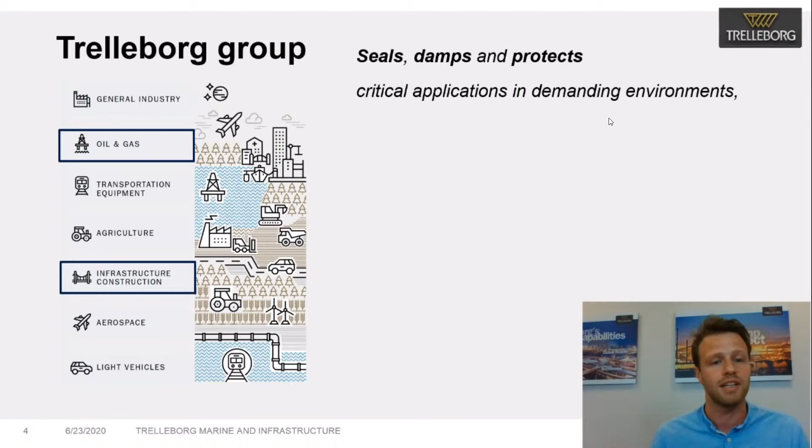I'm not sure what your geographical knowledge about the Netherlands is. That's why I showed a big map of the country we're living in. And the company of Trelleborg Ridderkerk is located where the big red arrow points at. It's basically located at the perimeter of Rotterdam. And the business it entails has to do with immersed tunnels, underground construction, energy, dredging, water management, and noise and vibration. So we are here already for more than 140 years, so we have quite a lot of experience.

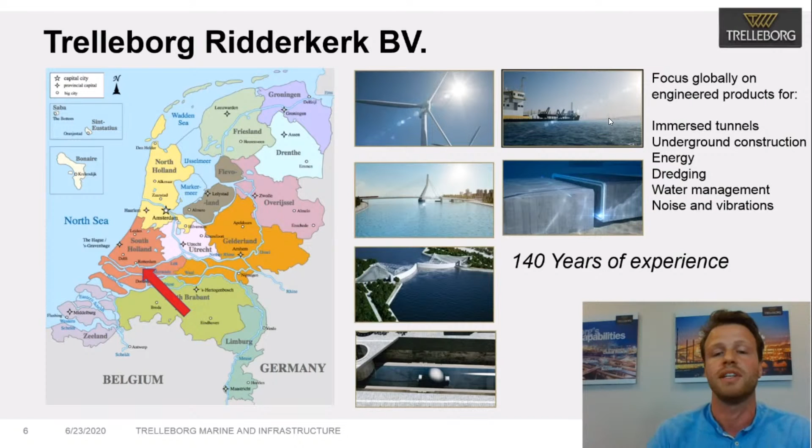And on these pictures you can see some key projects we've been involved in. So that is, for example, immersed tunnels on the right side, the storm surge barrier, and you can see the Erasmus bridge where we created the bearings for.

As I mentioned, I'm design engineer, and these 4 products are some key projects I've been involved in. 2 of them are very big Chinese projects, which is the Dalian Bay link on the upper right picture. Underneath, you can see the Shenzhong link, and both of those tunnels are still being constructed as we speak. A bit older tunnel is the Guldborgsund tunnel in Denmark. That one was mainly a renovation project. And the one below is the MOSE flood protection project in Venice, which is designed to keep the water out of the city.

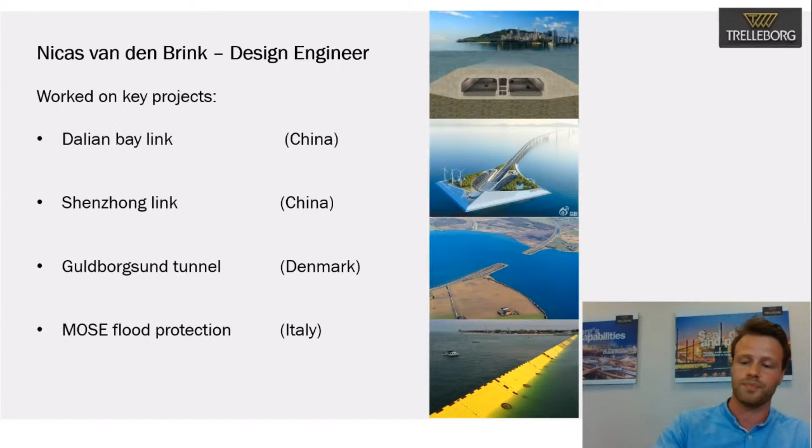So let's dive a bit into history. It all started out with the Thames Tunnel. So I think a lot of people already know about this tunnel, which is quite a famous one. It was the first time that there was a need to build a tunnel under a waterway, which was the Thames. So back in the day, London was a big metropolis.

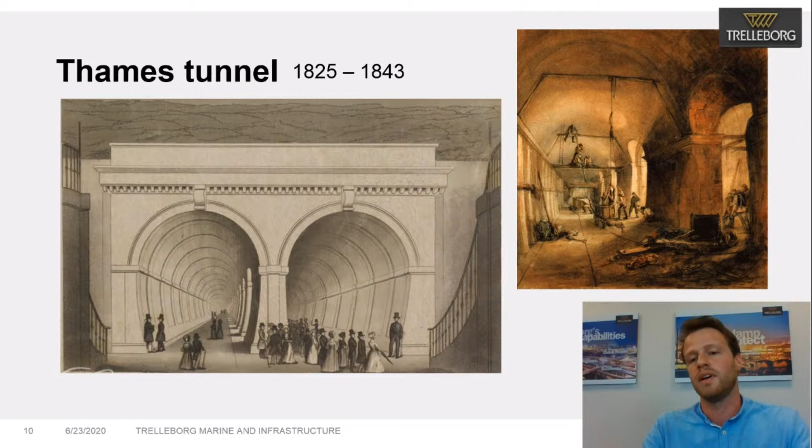There was a lot of business going on, and there was a need to cross the waterway in order to arrive at the docks. However, a bridge was not suitable for that application, as it would stop the sailing boats from entering the city. So they needed something else, and that's why Marc Brunel first made a tunnel under the Thames, under a navigable waterway. However, this was still a bored tunnel, so it was still not the beginning of immersed tunnel construction.

And the first physical proof that the concept really worked was in 1893 with the Boston US sewer tunnel. However, it was still not a tunnel that could be used for human transportation. That happened actually later, about 20 years later, in Detroit in 1910. So this picture shows what that tunnel looked like. It was a steel tube tunnel, a double one, and you can still see it today as it is still in use between Windsor and the city of Detroit.

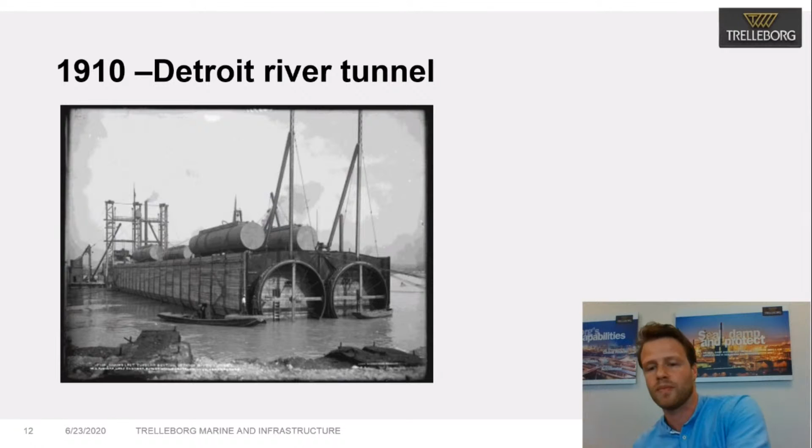So this project is a bit closer to home, in my hometown of Rotterdam. Here you can see the creation of the metro tunnel. It's being constructed using cut and cover construction, so it was not lowered down, but it was actually made on site. And on the right side, you can see the first GINA rubber product that we created in Ridderkerk that was actually applied within this construction.

The nice thing about the story is that during renovation work, we received some samples of the GINA seal gasket and other rubber products back from the tunnel owner, which provides us very valuable information about the lifetime and the rubber qualities over time when you place it into a situation like this for more than 60 years. So I will come back to this GINA profile and the properties of the rubber material that it has after a certain amount of time.

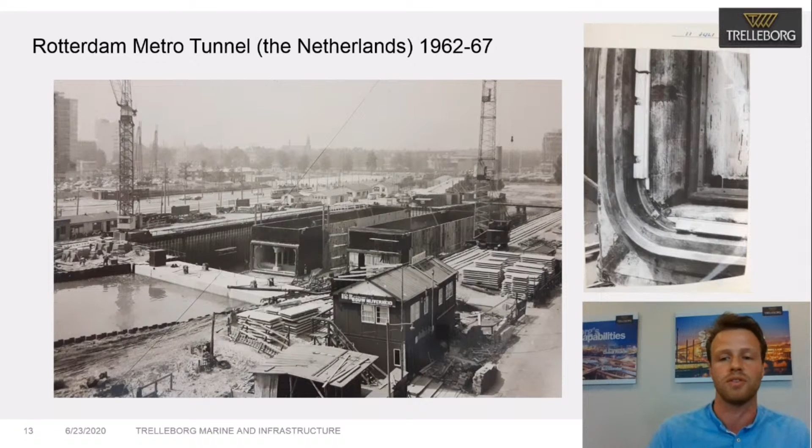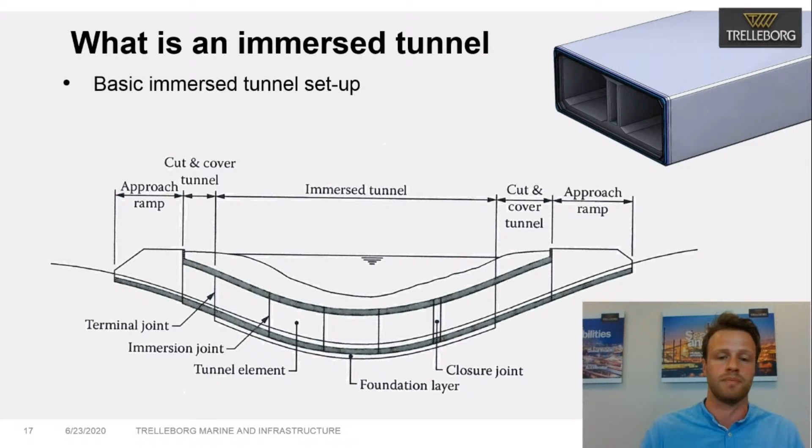So now the question arises, why actually build an immersed tunnel? Because there are so many other options to cross from point A to point B, obviously. Well, it depends on what your situation is. But there are a lot of advantages for immersed tunnels that speak for this technique. At first, it's very suitable for short, shallow crossings in soft soil.

Also, the shapes are very flexible in dimensions, because you can just lower different types of cross sections. And if you want to provide a tunnel that has different lanes, you can do that. You can just construct a 6-lane cross section and lower that into the trench. And you can also change those 6 lanes to an 8-lane or less, obviously. That's something that cannot be done so easily with a bored tunnel construction.

Another advantage is the land reclamation opportunities it provides, because you have to suck out land in order to make the trench in which you place your immersed tunnels. This land can be used simultaneously to create artificial ground or artificial islands in the surrounding area.

And last but not least, it can be economically very feasible to use this kind of technique too. So mostly these types of techniques are used in areas where there's a lot of water, a lot of urbanization going on, and the soil is a bit softer than usual. So keep this technique in mind when you are designing for these kinds of circumstances.

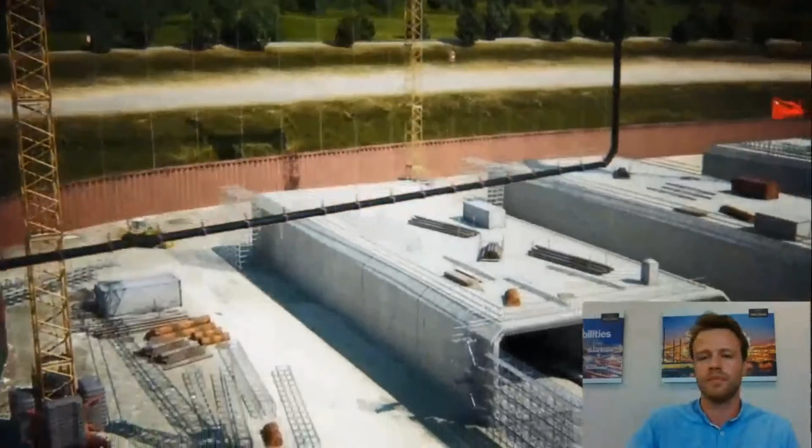Now I will show you a short movie introduction of the immersed tunnel technique that will hopefully clarify everything I just said. So here you can see the building.

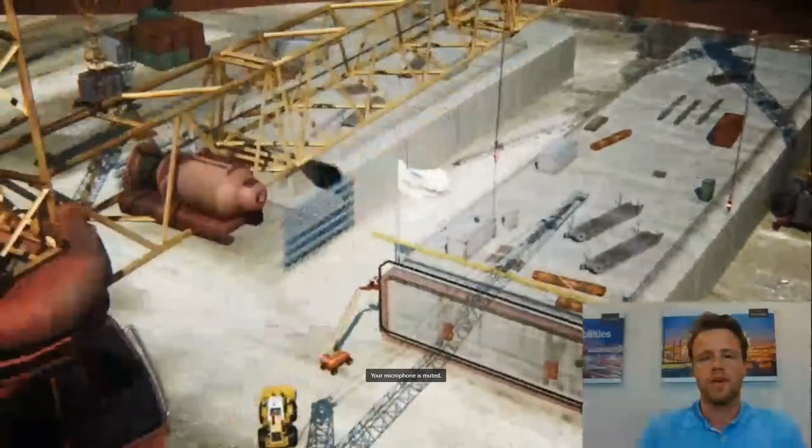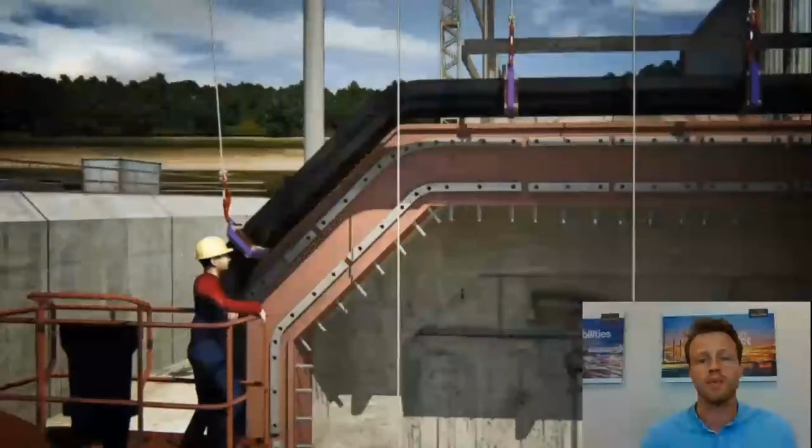So the big GINA seal will be installed on the dry dock by clamping it into place. So you will use steel end frames, steel clamping systems to make sure the GINA seal will stay in place. You bolt it down together, provide enough clamping force in order to make sure it stays in place.

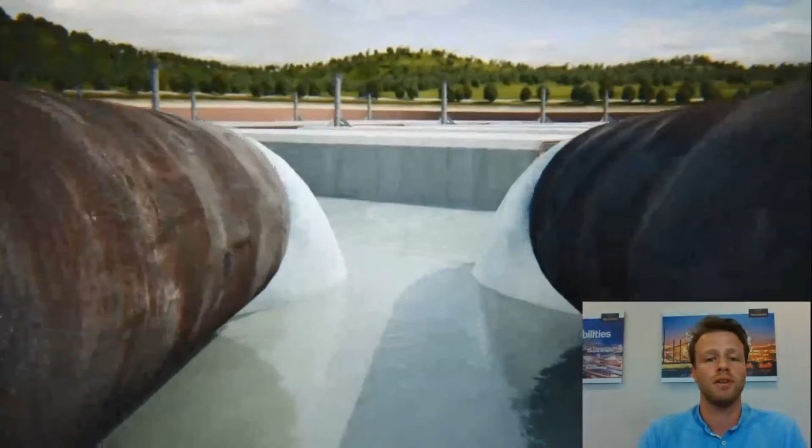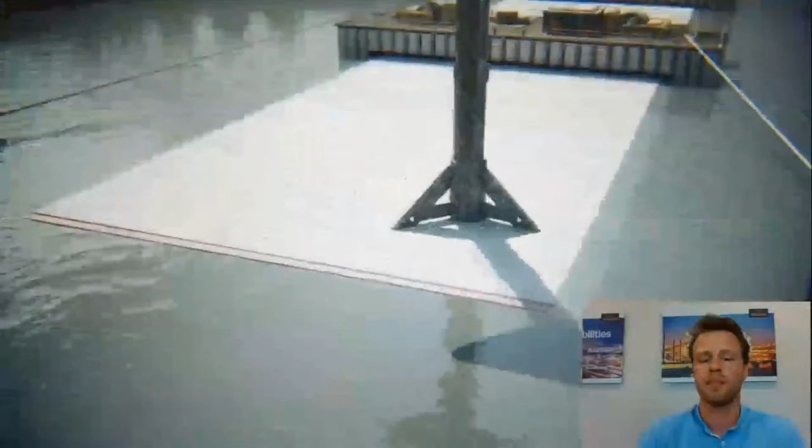So here you can see that, obviously. There is more compression. Now we can see the omega seal being clamped into place, which is basically the secondary sealing solution. And many more are to follow. And when everything is done, you will see that an infrastructure is being created.

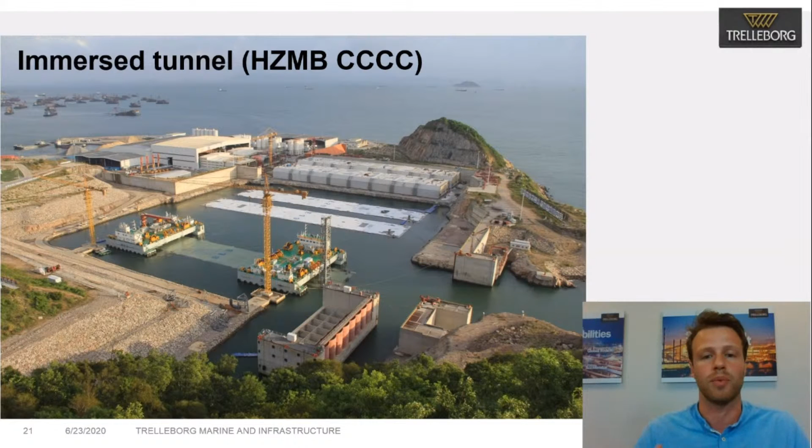Here you can see those tunnel elements are being floated after the dry docks are filled up with water, and then those elements are moved to the right location.

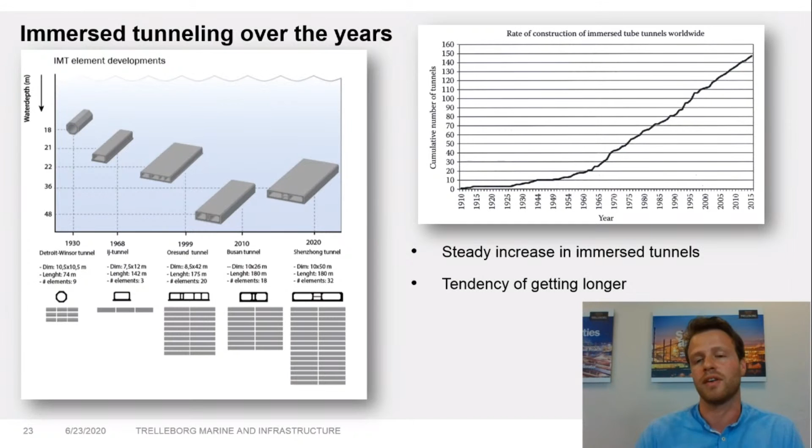At the same time, we see a steady increase in immersed tunnels. On the right graph, you can see that there is a very linear progression in terms of new immersed tunnels.

So there are different types of immersed tunnels, because at the Detroit-Windsor tunnel we saw that the first immersed tunnel was a steel tube type of immersed tunnel. But in total, you can say that the concrete monolithic type of immersed tunnel is way more popular. It entails more than 50% of the total amount of immersed tunnels.

And yeah, this technique is mostly used in Europe and in certain parts of Asia as well. It kind of depends on what the requirements are. Sometimes political pressure is also of huge influence in the decision making for these types of different structures.

You can imagine if you're living in a country or a place where the shipyard industry is very big, that there is a big lobby to make these types of immersed tunnels with steel shells. But when the experience lies more in the field of concrete pouring, you can imagine that people want to go with this type of tunnel. Another big advantage with concrete monolithic structures is that this technique is way cheaper to perform than steel types of tunnels. And the single steel shell, for example, is something you don't see that much anymore these days.

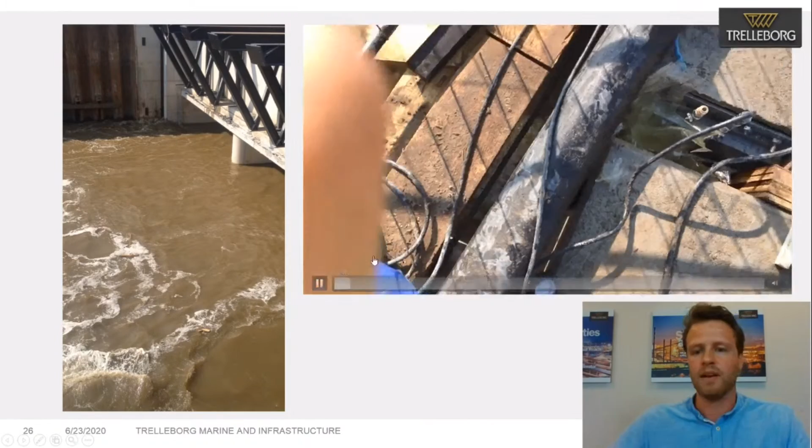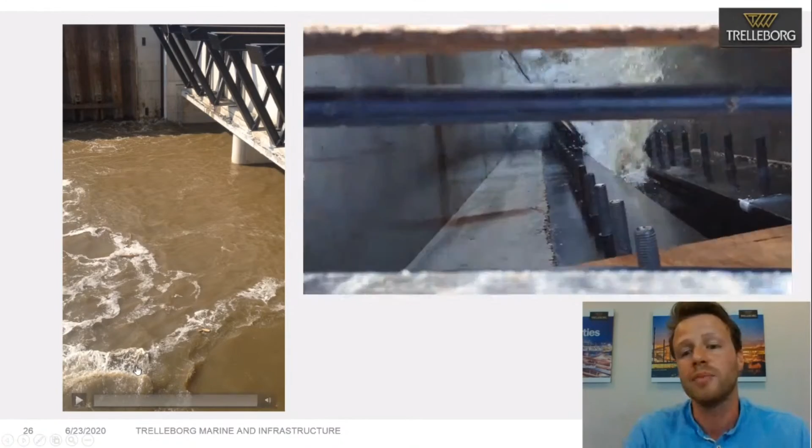Sometimes things go wrong when you construct immersed tunnels. That's obviously not something you want to happen, but calamity is not a stranger to us. We have experienced different types of calamity in the past, and we do not run away from it, but we like to learn from those mistakes. So here you can see my colleague, who is in a building construction, and an inflatable type of seal was not performing anymore. So the whole construction site started flooding with water. There was just a combination of different things going on at the same time. Fortunately, nobody got injured that day.

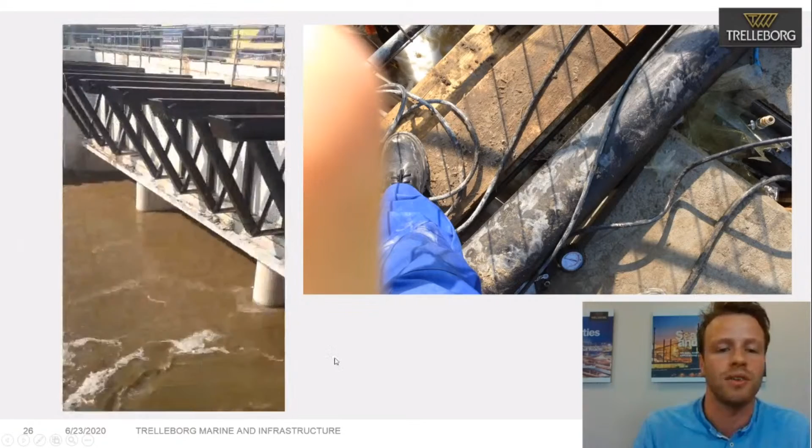However, this obviously has a lot of financial consequences when something like this happens. Eventually, everything worked out fine. We worked together with the contractor and the other parties involved and found the best solution for this small disaster, you could say.

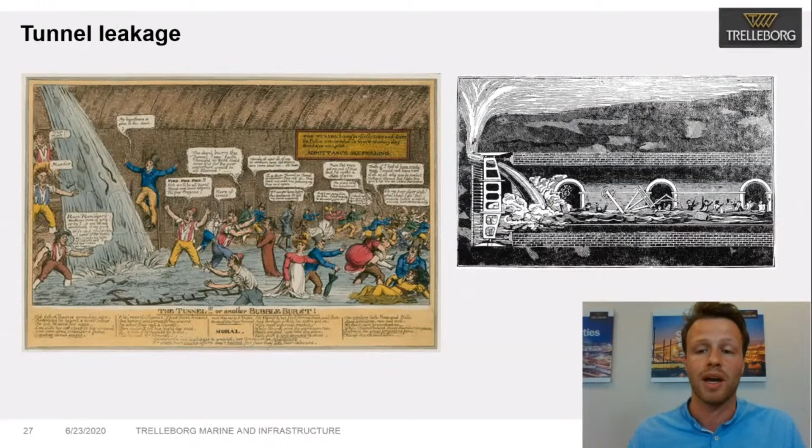Calamity was also not a stranger back in the day. During the construction of the Thames tunnel, there were 6 different floods. During the second flood, there were even 6 deaths reported. And there was a lot of skepticism back in the day, whether it was even possible to cross such a navigable waterway. Fortunately, people just continued pursuing this type of technique. So that's the reason we are here today with the tunnels we have these days. So we should be grateful for that.

So we talked a lot about steel and concrete. Now let's see how rubber fits in this whole story. When you design for immersed tunnel projects, there are a lot of different environmental impacts that can have an influence on your joint design. For example, when you start building an immersed tunnel in a high seismic area, for example in Istanbul, you have to take into account that there can be a lot of dynamic activities influencing your seal. So you have to make sure those tolerances are lined up with your design. Also, when designing with concrete, those elements tend to expand and retract over their lifetime, which are also tolerances you have to accommodate into your design.

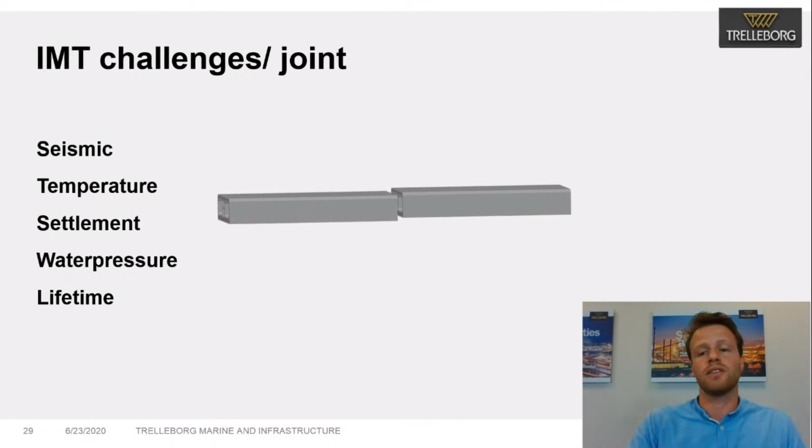Ground consolidation over the years has a huge impact on your joint design too, and at the same time you will have water pressure that ranges from high tidal pressure to low tidal pressure, and it can affect it during its lifetime. When you design a tunnel for 120 years, you can imagine there's a huge range in water that it has to accommodate. As I mentioned, a general lifetime lies between 100 and 120 years for these kinds of tunnels. It depends who the tunnel owner is.

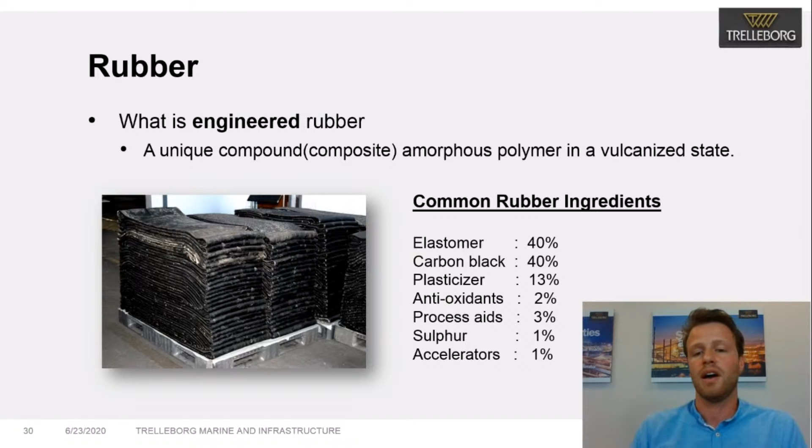So if we look at rubber as a building material, in the lower left corner you can see how the rubber generally arrives at our factory in Ridderkerk, like big sheets of plastic layers, rubber layers. Rubber is a unique compound. It's an amorphous polymer in a vulcanized state. And the general ingredients that it contains are listed on the right side. So it has a lot of elastomers, obviously, carbon blacks, hence the black color. Sulfur is needed to make sure everything can be vulcanized.

It basically functions as an accelerator, but you can combine it. It's basically a recipe for the things you want to build. If you want to build a rubber that's resistant against ozone, you probably need different ingredients. If you want something that is resistant against oil or gas or something else, you will need a different type of recipe to come to the right compounding.

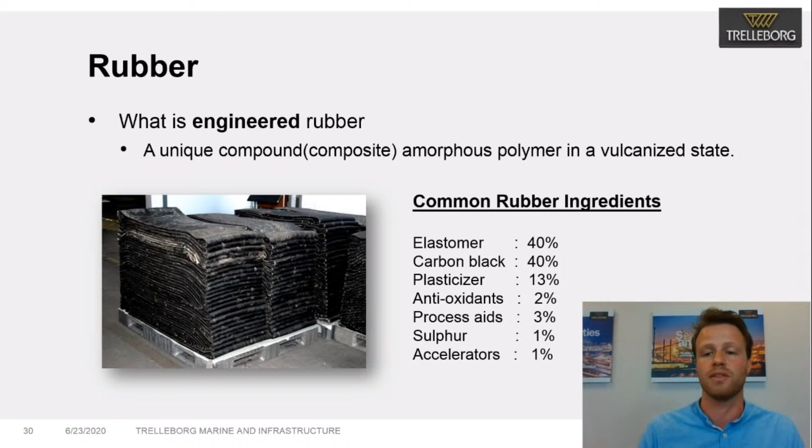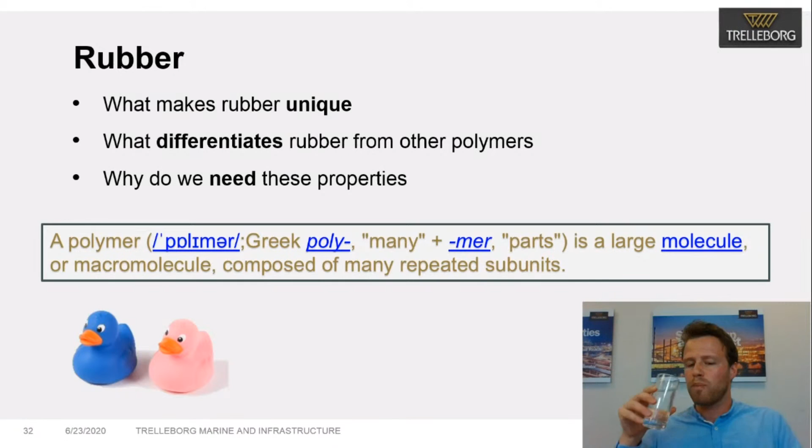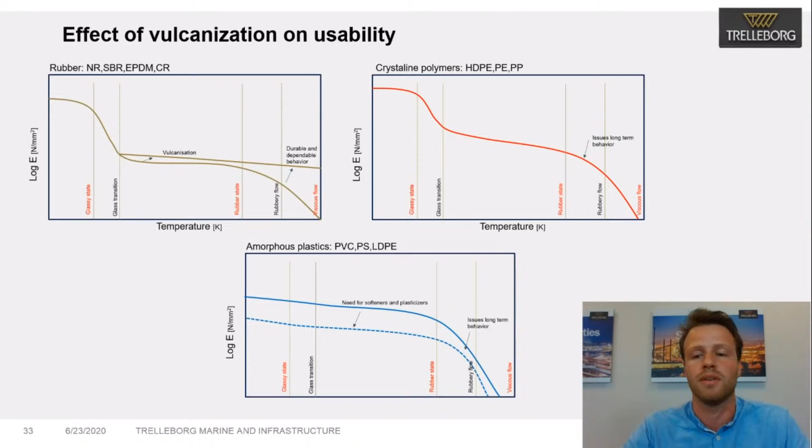So here you see the engineering bandwidth of a vulcanized piece of rubber. It's quite a big range. And there are also some other rubber characteristics you have to take into account because it's a very unpredictable material at the same time, which means it's a viscoelastic material. In other words, it does not behave like Hooke's law. That makes it at the same time very difficult to perform FEM analysis on, for example.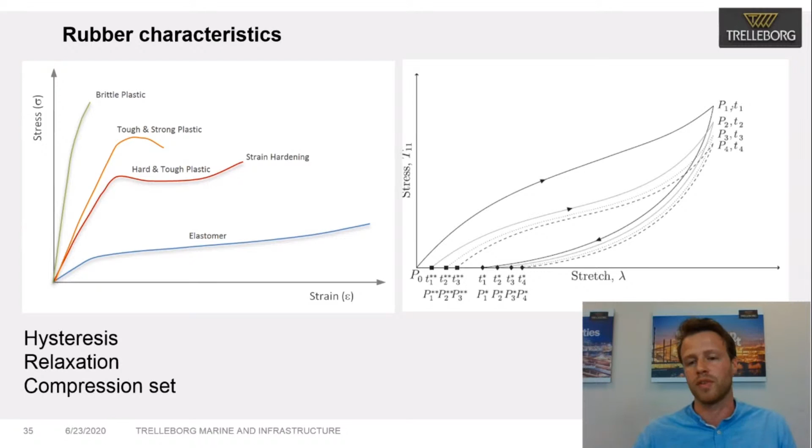The compression set is also something that influences the material of rubber, which means if there's a dynamic compression of the material, the rubber does not go back to the same position it originally would reach, which means the material behaves differently than originally was anticipated. Also, relaxation takes a huge part in its unpredictable behavior, which means when you have initial compression of your Gina seal or another type of seal, the stress will lower over its lifetime. So those are all different types of characteristics you have to keep in mind when designing for these kinds of purposes.

We have, for example, the NEN standard in the Netherlands, but you also have the DIN standard in Germany. You have the GB standards in China. They're all different, and you can play along with that. So if, for example, one manufacturer of seals complies to certain parts of norms, in order to compete in the same business, you also have to comply to their standards. So you can say it's a quality assurance tool, but also a strategic tool at the same time.

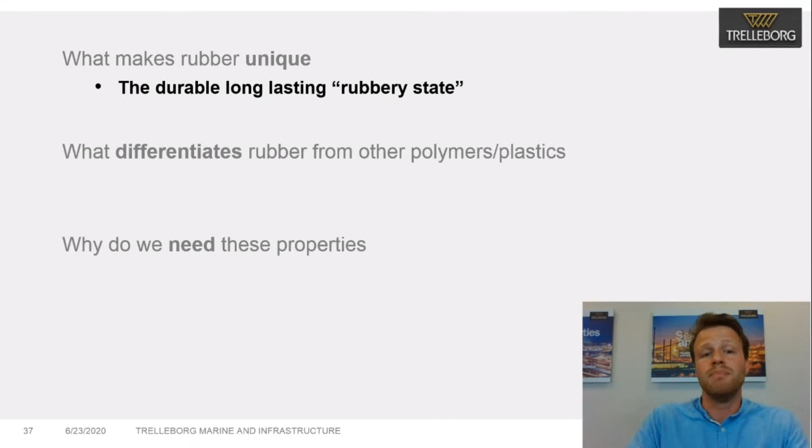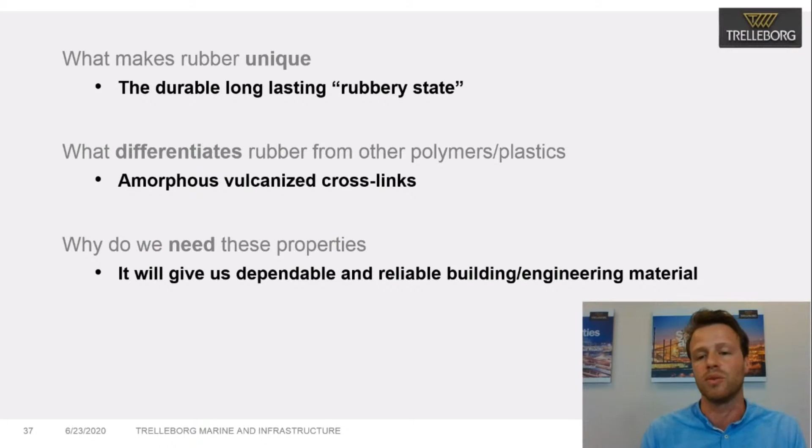A small recap. So what does make rubber unique? It's mainly its durable, long-lasting rubbery state that is being created due to its amorphous vulcanized crosslinks. And that will create a very dependable, very predictable, reliable building material that can be used to make these concrete steel constructions watertight for a very long time.

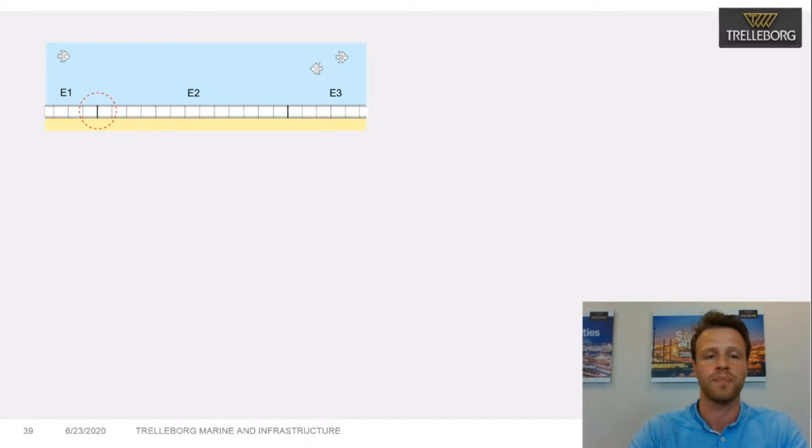So it's time to get a bit more practical. As I mentioned before, those tunnel elements are being constructed on land, and they will be lowered into a trench. So on this picture, you can see tunnel element number 1, tunnel element number 2, and number 3 as well. Those small vertical lines being displayed are the segment joints, and the bigger one with a red dot around it is the immersion joint. If we zoom in a little bit more, you can distinguish 3 types of seals, number 1, 2, and 3.

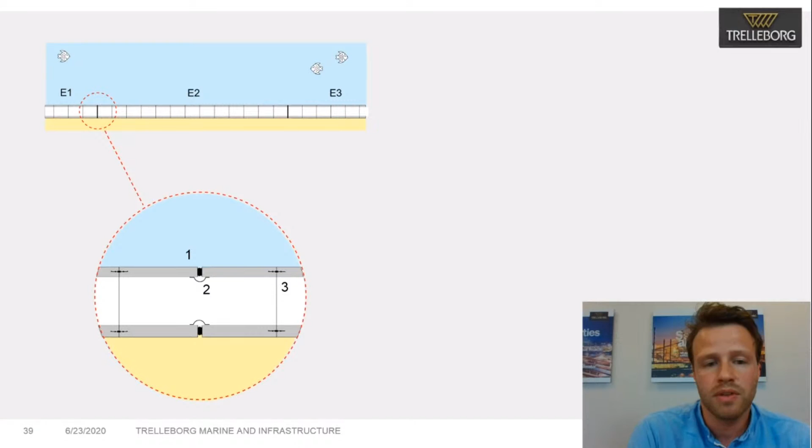So we have the GINA profile, the Omega profile, and the Waterstop. Maybe you can give one to me. Yep, here we go. So this is one of the big guys, the GINA seal.

We have a membrane seal, so this is basically not a compression seal. This seal will be constructed on the inside of the tunnel construction. Then, number 3 is the Waterstop, which is a joint you will pour into the construction, so it's not visible. I mean, if you construct it well, it's not visible at the end anymore.

Yeah, nice, what's that? For at home. Yeah, for at home, exactly.

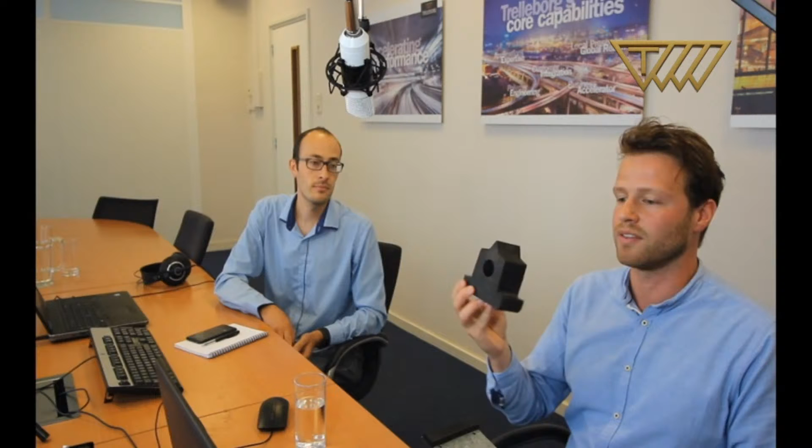It's a smaller version of this GINA profile. As you can see, it has a tiny hole in it as well. That is meant so you can produce it easier due to less vulcanization time. And at the same time, you will create easier initial compression because it behaves differently, obviously.

Here you can see another seal. This is the inflatable seal. So this is a cross section. It obviously is way bigger than being displayed over here. What happens is you place it into the construction, you will pump it up with water, and it expands, and it can be used as a temporary seal and also as a primary seal in certain circumstances.

So the GINA profile, the big one. You can see that the GINA profile started out rather small and started developing over the years. So you can say it becomes bigger and fatter over the years, just like with human beings. And it actually follows the same kind of trends as the immersed tunnel construction. You already saw that the immersed tunnels were going to be wider, longer, and deeper. And the GINA seal design actually follows these kind of trends.

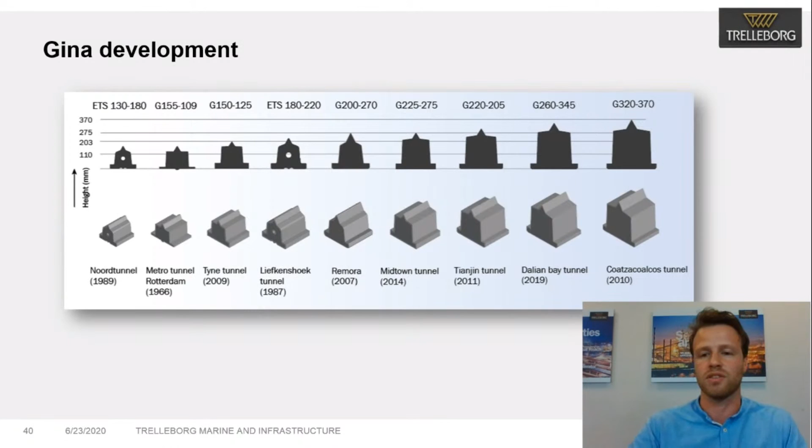So the GINA seal basically contains multiple types of compounding. The GINA over here looks as one big part of rubber. However, the nose often has a different, lower type of compound than the body. And the flange often has the highest type of compound because you want it to be hard to clamp it in the right position. Whereas the nose is lower in shore hardness to create a bigger compression during initial compression.

So we have 60-year-old samples of GINAs, which is useful, obviously. And we design these types of compounds with low relaxation because that has a huge influence on the performance of these types of seals.

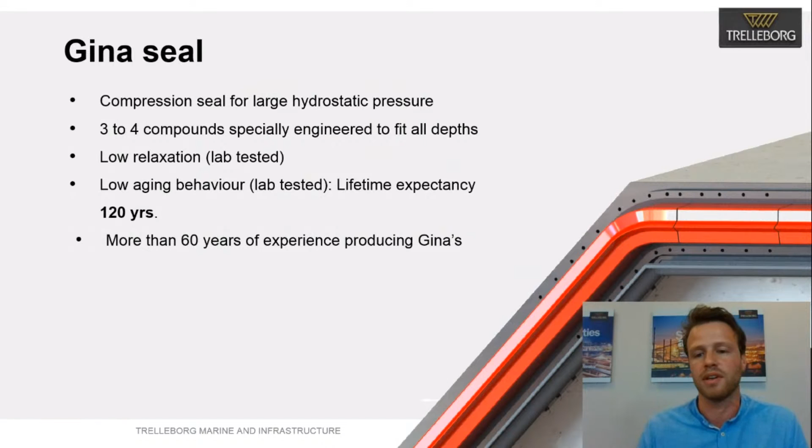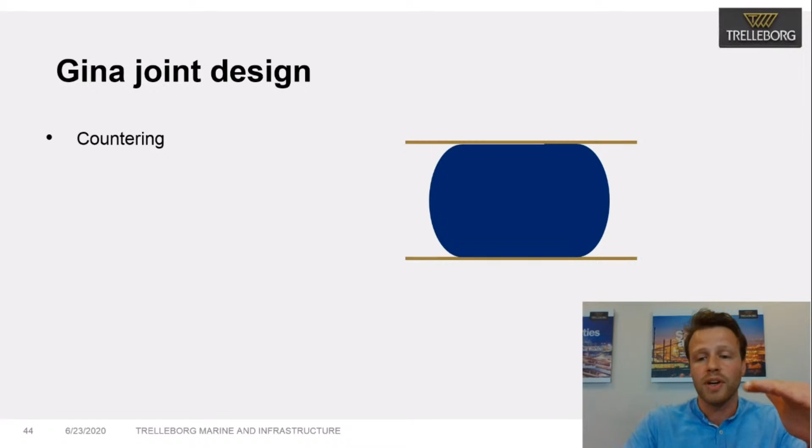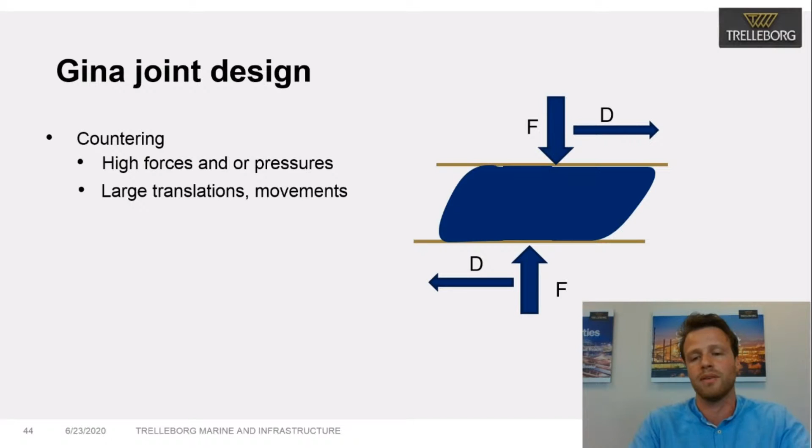So what basically happens with the GINA seal, what does it need to do? So at first, you have a lot of compression that it needs to accommodate. High forces and pressures. Then you have large translation movements that have to do with the settlement I was talking about. So it has to deal with these side deformations too. Apart from that, there's a lot of durability and environment that it has to deal with.

So to put it into perspective, these are typical ranging forces you have to deal with. We're talking about 150,000 kilonewtons compression that it has to take. It needs to deal with about 100 millimeters transverse axial deformation. That has to do with the settlement, mostly speaking. And then we have tested these seals with pressure up to 9 bars. We never applied 9 bars; mostly the deepest immersed tunnels are ranging between 20 to 45 meters in total. Last but not least, the lifetime requirement.

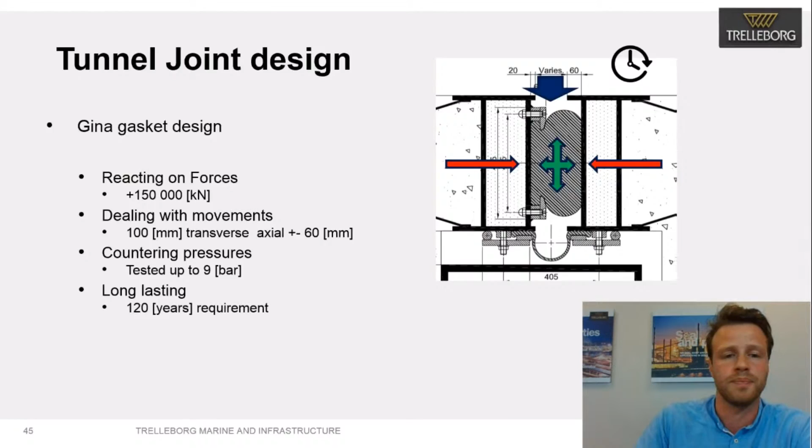So before we send those products to the client, they are often tested. This is a typical test setup we perform. It's difficult to test those seals one-on-one because they are just too large. You cannot compress the whole seal. We don't have the means for that. So we often go for the angles, the corner sections. Those sections are known to be the most fragile in the whole construction. So if we make sure those corner radiuses perform well, we can assume the rest of the seal will perform accordingly as well.

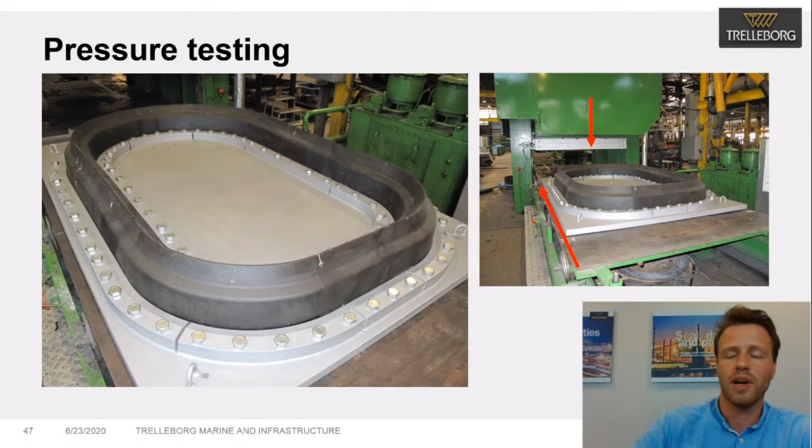So on the right side, you see a press. The GINA mock-up is placed under the press, and it's being compressed to the amount of compression you want to have. So within this construction, the pressure will start getting higher. In the meantime, the pressure will build up in this construction. And a small leakage is visible.

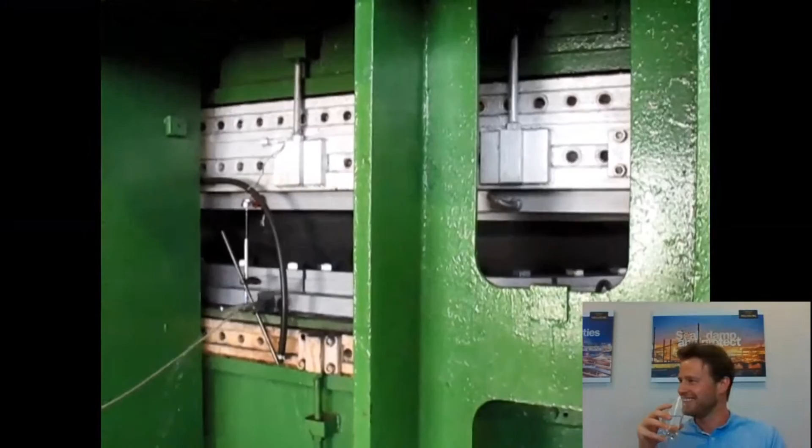And there it goes. So as you can see, a lot of force is going on when there's a leakage occurring. So that's definitely not something you want to stand in front of.

So you can imagine you can create all different types of setups and ranging types of tests to make sure that you deliver the right product with the right validation accordingly.

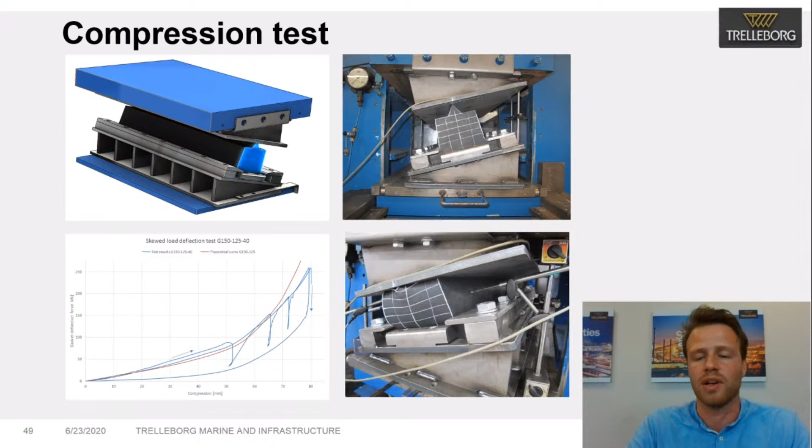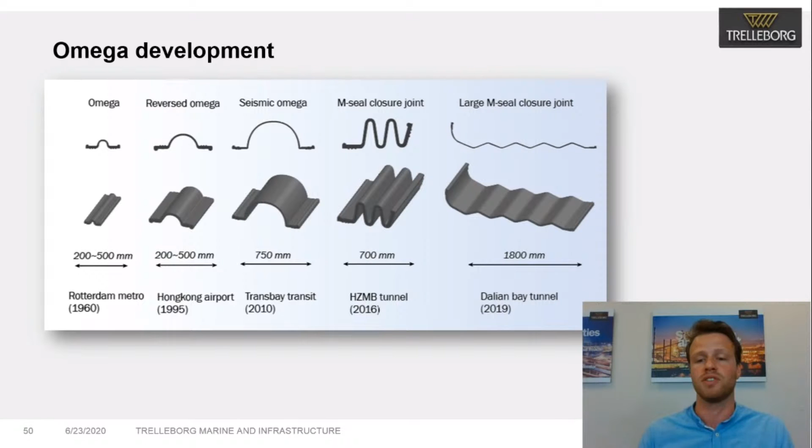At the same time, we see also the need for other types of seals. On the right side, you can see the M seal, which is basically the same as an omega seal, but then just way larger. And those seals are being applied in closure joints. I will come back later to the concept of closure joints, but first I will start talking about omega seals.

So the omega seal, as I mentioned, is a secondary seal. It's not being loaded due to compression. It functions as a membrane basically to cover up the joint. We also have 60-year-old samples for these types of omega seals due to renovation works in Rotterdam. So that gave us a lot of information on how that particular seal was performing over the years. And we tested the seal for over 20 bars of force.

So inside the omega seal, you will have an inlay material. So the stress is not being distributed to the rubber material only. It basically is done due to the fiber construction inside. And the rubber layers are only meant for making the whole construction watertight, basically.

So here you can see a typical cross-section of the omega seal. On the graphic below, you can see the GINA seal being compressed, and the omega seal is clamped in place later on. So what most of the time happens is that those anchors are already pre-installed on site, and when the omega seal arrives on site, you only have to clamp it in place, and you have to determine what the clamping force needs to be to make sure that the omega seal will perform accordingly.

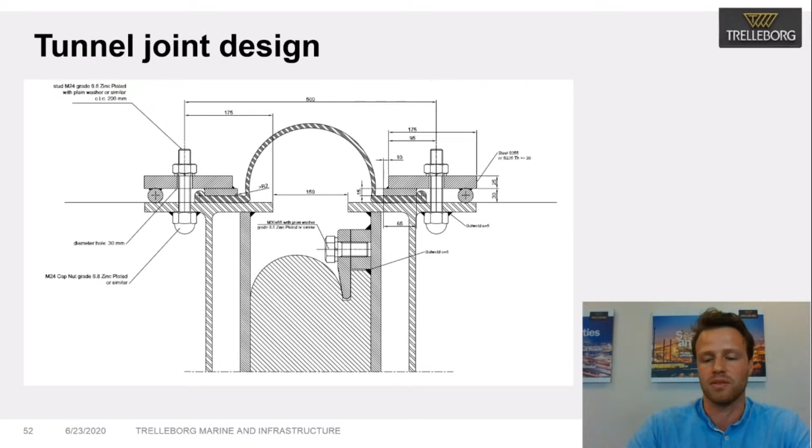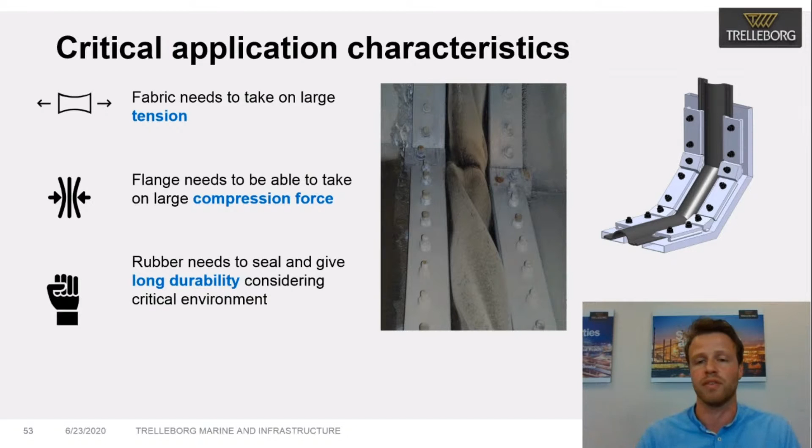So this is an omega seal being installed. It looks a bit warped at first glance. However, this is perfectly normal behavior of the seal. It kind of shows that this type of seal can accommodate a lot of behavior during its lifetime. So what probably happened in this situation was that during the positioning of the elements, they were slightly tilted. But those building tolerances are definitely something you have to take into account while designing an omega seal.

So those omega seals are sometimes tested as well, especially when you create a special type of omega seal. This is a type of construction you can use for that. You basically place 2 omega seals next to each other, and you will increase the pressure within those omega seals to check where the failure mechanism is and to check how the clamping system behaves over time.

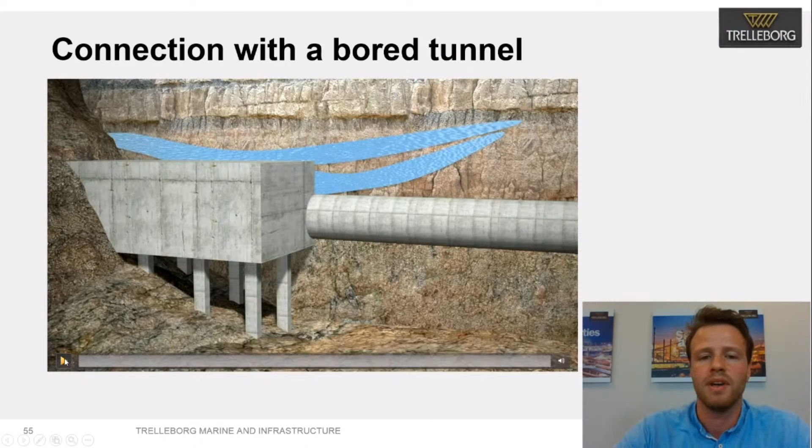I'm aware that in India there are not so many immersed tunnels happening. However, omega seals can also be applied in different types of constructions. For example, in a station box tube connection. It's a very useful tool. Basically for very weird, complex transition areas, an omega seal will perform very well.

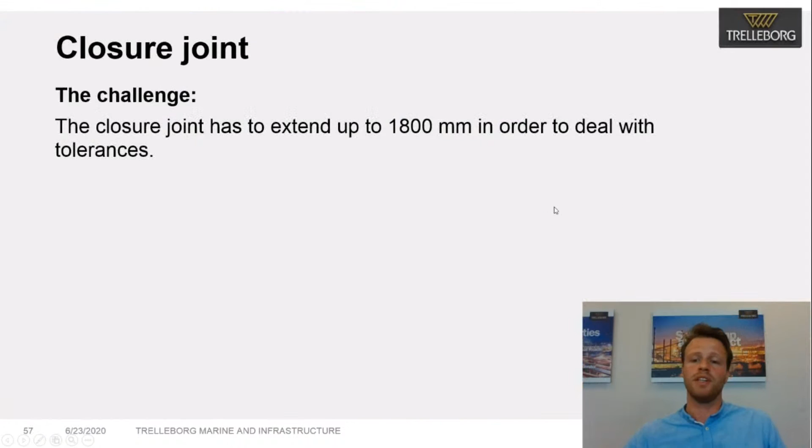Right. So the omega closure joint, that's a special type of seal. You don't see that often, to be honest. So in this case study I'm showing over here, we had to make an omega seal that had to cover 1800 millimeters in order to deal with the tolerances it provided.

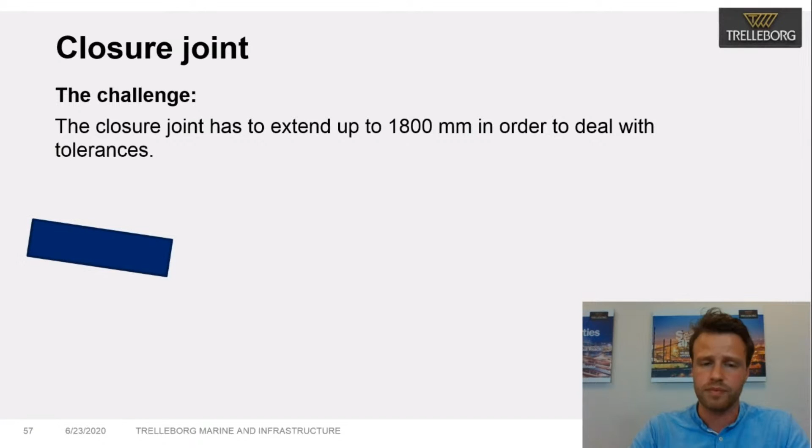So how does a closure joint work? When constructing an immersed tunnel, you will lower the elements accordingly. However, at the end, you will see that there is a stack up of tolerances that you are not sure about. And what happened in this situation, the client created a closure joint that could be extended in order to make everything fit, which is shown over here. This was the closure joint being constructed.

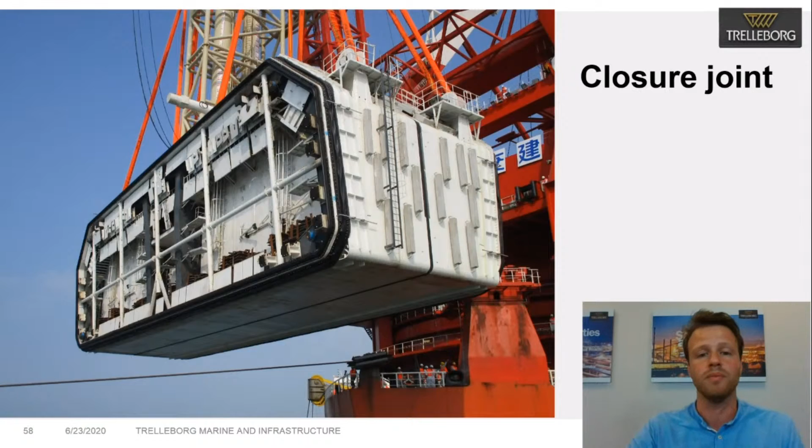On the left side, the black area represents the M seal. It's being lowered in place. So this is how it actually works. On the left side, you have the elements. On the right side, you have the other elements. And in the middle, you will sink down this closure joint. And you can see, if you follow the arrow, that this part can be extended and can perfectly fit between the 2 adjacent elements.

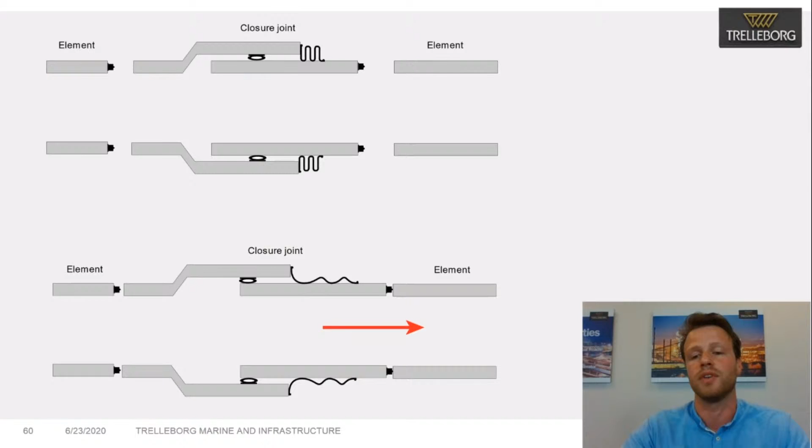So the sinus shape is meant to create the harmonic movement, but also production-wise, it's useful because if you can minimize the total width of the mold, you can minimize the costs. So that also works. So you create those sections ranging from 5 meters to slightly bigger, and you have to vulcanize those sections into place. So you will end up with a very, very long linear length of this seal, and then you have to vulcanize the corner sections to those linear parts.

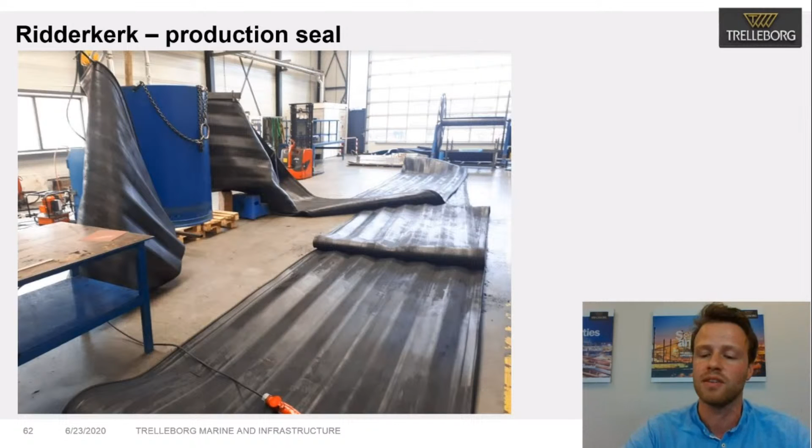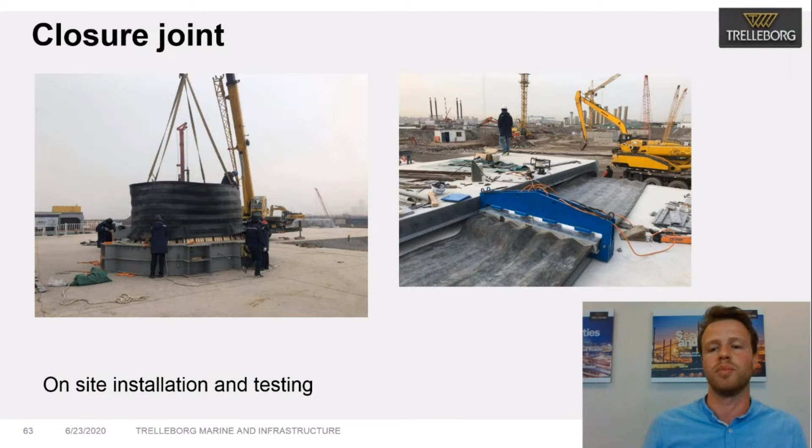So for this project, it was very difficult due to the multi-curved structure it contains, which was definitely a challenge. However, we succeeded. Here you can see the mock-up structure on the left side on site. So we created a test setup and a mock-up structure to give the client validation and trust that it would work at the end. On the right side, you can see the vulcanization press that connects the two linear parts and makes a closed ring that could be placed on the concrete structure.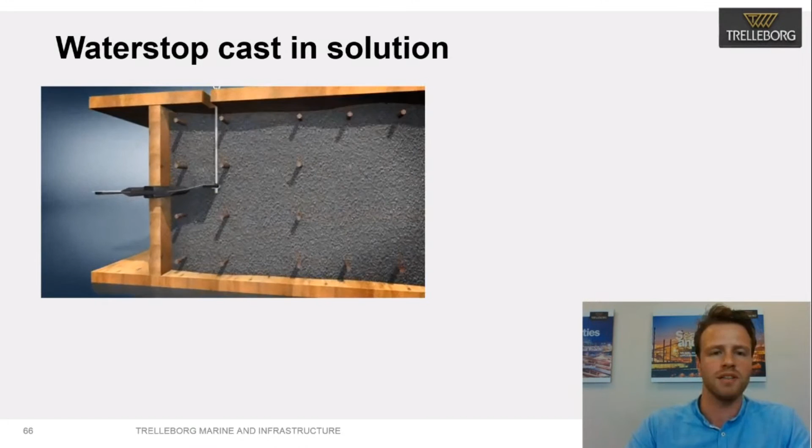So the worst case scenario of an immersed tunnel is often seen as a sinking ship. So when the ship goes down and lands on the immersed tunnel, you definitely want your structure to accommodate those movements in your tunnel. So this is the working principle of a Waterstop. You pour it in on one side, and after it cures, you pour the other side as well.

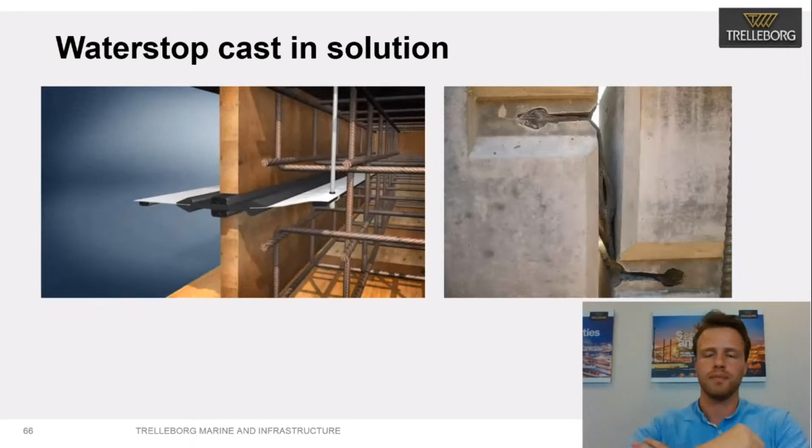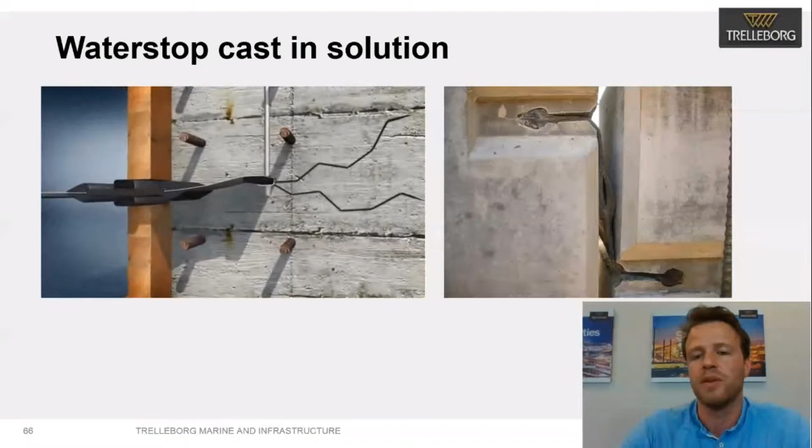On the right side, you can see that the Waterstop can accommodate a lot of shear movement too. This is definitely not a normal situation. In this situation, one of the elements started floating. So that's the reason why there's so much differential movement visible. This is definitely not something that's required or wanted. However, you can see how versatile the material is and it can work.

Oh, what happened here?

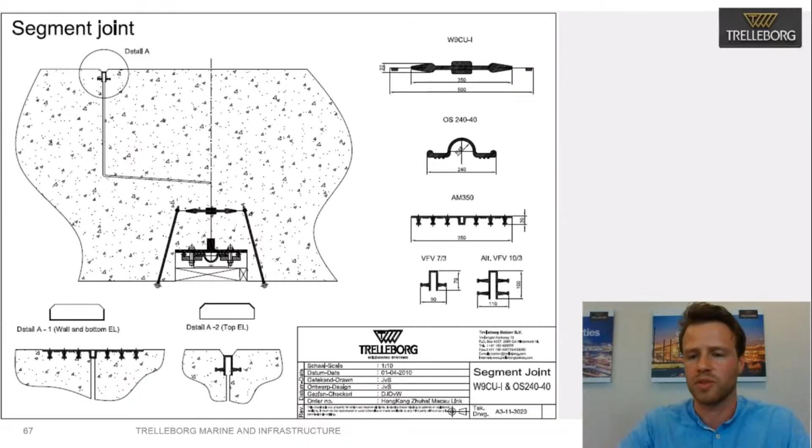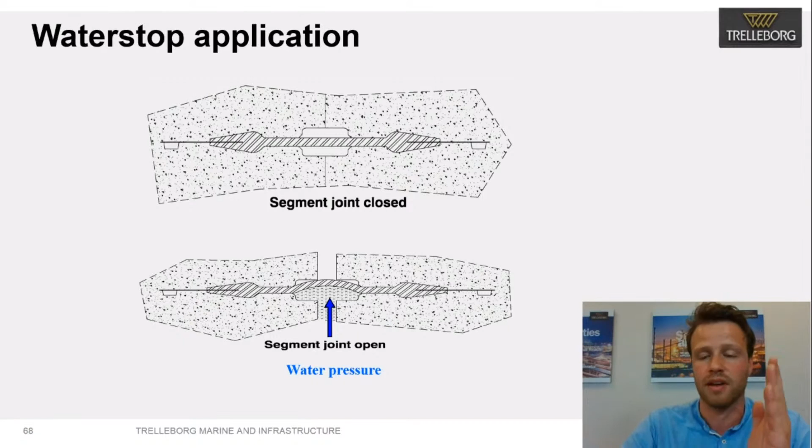So for the Waterstop application, this is what basically happens. You pour the Waterstop in, and when there is a movement, for example when the concrete starts expanding or retracting, you will create a small joint opening in which the full rubber material starts to create an arch shape due to the water pressure in that direction. So the water pressure causes this arch forming, and it results in a reducing radius and thus also in stress decrease in the material, which is useful. That's something you want to have.

With the Waterstops, there are some challenges involved, obviously. One of those challenges is the transport and installation of these types of products, because they're rather fragile when you roll them up in a reel, and when you have them placed on the construction site, they're easily torn, for example. You have to make sure that doesn't happen. Also, air entrapment is an issue. So when you place them inside, air gets under those constructions, and you can have air entrapment and small cracks. We'll get back to that a little bit more later.

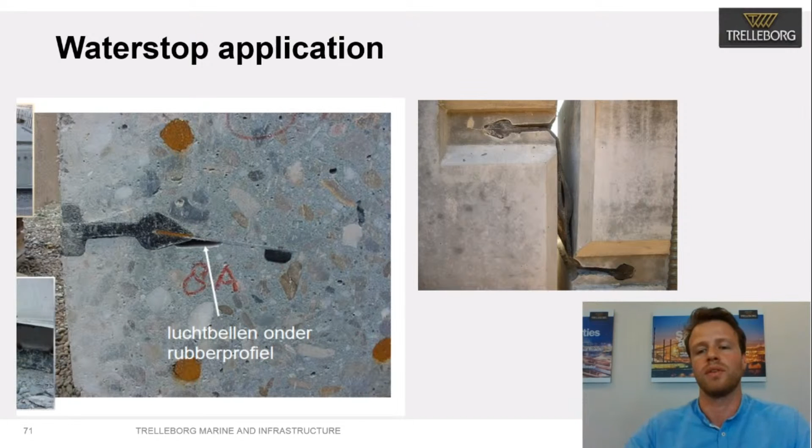During the concrete expansion and shrinkage, you have a lot of elongation, also tensile strength within your Waterstop. As you also saw in the last visual, sometimes there's settlement going on, and you don't want your Waterstop to tear at that point. The rubber metal bonding is also of importance. It has to do with the tensile strength that acts on this Waterstop, and you don't want your rubber rupturing from your metal. So here you can see an example of air entrapment during the pouring of such a Waterstop, and you can see an example of how a Waterstop can deal with these types of settlements.

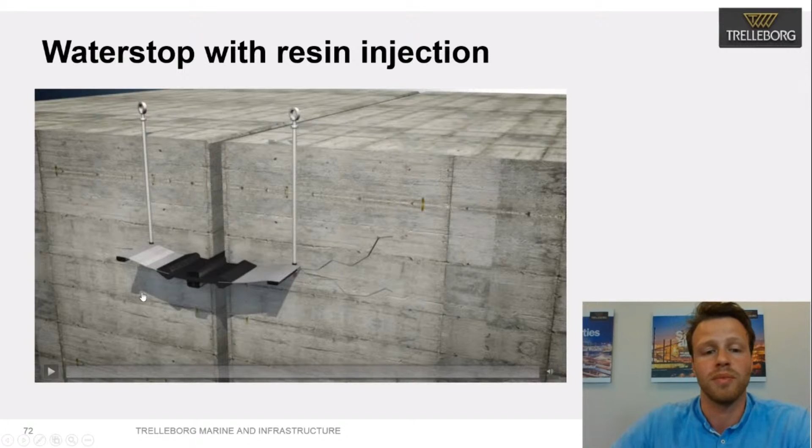There is a solution to make sure air entrapment and cracks do not affect your Waterstop that much. So here you can see the injection system with resin. What happens is that you pump with 10 bars an amount of resin into your Waterstop, and that resin flow will follow the path of least resistance, and thus fills up the cavities that can occur.

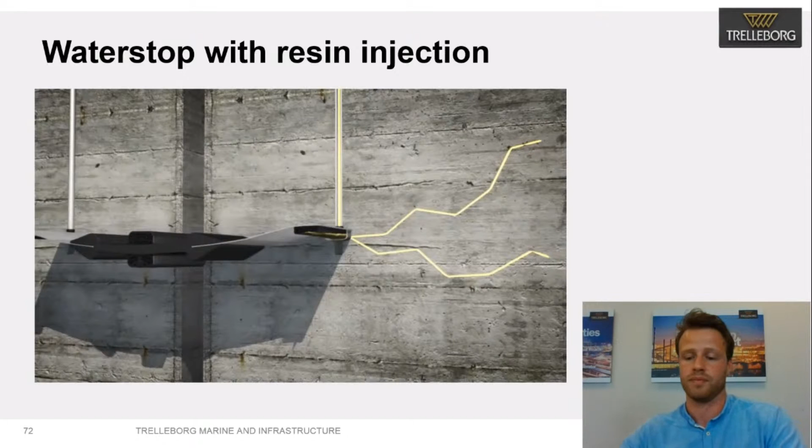Waterstops are also tested on how they are performing. So we did dynamic cycling tests and static tests up to 9 bar. What we did is we poured these Waterstop rings inside concrete blocks, and we performed different ranging movements while also increasing the pressure up to 9 bars. And we wanted to see what the failure mechanism was and when it started leaking.

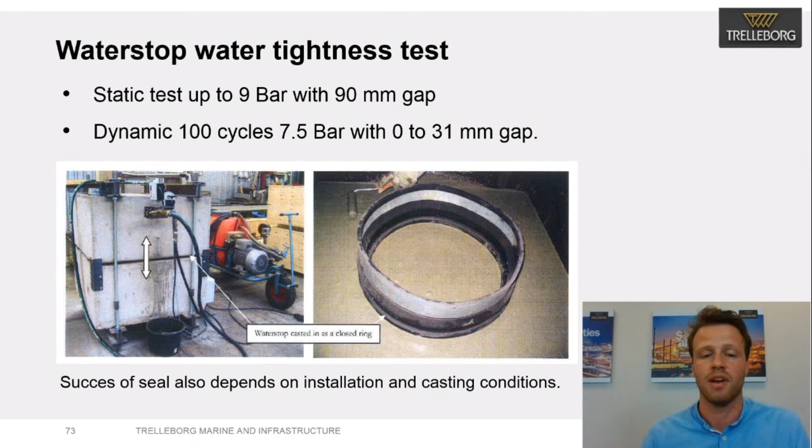So we are currently developing our Waterstops because, as I already mentioned, there are some difficulties with the injection possibilities. One of the developments we are working on currently is the implementation of more injection possibilities. You can imagine if you pour in a certain amount of resin at the beginning of your tunnel lifetime, you might encounter cracks later on. So we want to provide the extra opportunity to inject an amount of resin within the Waterstop, for example, after 20, 30 years.

Another thing we want to take into account is flexible injection hoses, because the current systems are rather static and difficult to handle. So if we could change that to a flexible option, it would be way more workable and easy to do the installation. Also, fewer injection locations would be beneficial, as it would save cost and the injection time would be limited, which is obviously something that would be needed and wanted.

So to do a small recap, immersed tunnels are very suitable for short, shallow crossings in soft soil. That's something we discussed at the beginning. Some trends are becoming visible in this world. Immersed tunnels are getting larger, wider, and deeper. And sealing products such as Gina seals, Omega seals, and Waterstops tend to become larger as well. They're just following the trend of the concrete constructions. And rubber is a very reliable, versatile material that can be used to build tunnels in combination with concrete and steel. So those are the 3 main messages I would like to share with you today. I hope that was all clear to you.